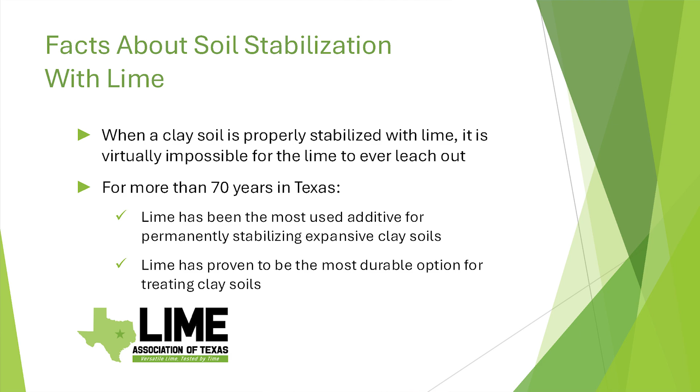So a couple of other facts: for more than 70 years in Texas, lime has been the most used additive, and it's the additive of choice for permanently stabilizing expansive clay soils. In fact, there's really not a good alternative to lime when you're talking about expansive clay soils.

It's proven to be the most durable option for treating clay soils, and if you look at any recommendations really throughout the United States and even in the world, people say that on high PI clay soils, lime is going to be the stabilizer of choice.

A few other facts about soil stabilization with lime: when lime is designed and constructed as specified, there's a couple of things you should know about lime stabilized soils. One, they'll start with a pH value of about 12.4, and that pH will remain at least above roughly 10.5 throughout the life of that subgrade. So 20 years, 50 years, 100 years down the line, you go check the pH of that soil, it's going to still be above 10.5.

It'll also continue to gain strength over time, and that pozzolanic reaction that's happening in the soil will continue to happen as long as there's enough free calcium and moisture in there to keep that pH up and to continue that chemical reaction.

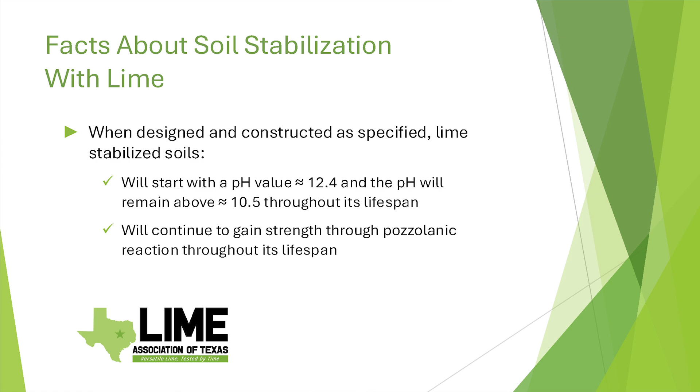This is a little slide I got from Tom Scullion from TTI doing some research on some projects in Texas, and this was just a particular ramp that he was looking at. So you start with an 8 KSI value for the native clay soil that was there. Once that was treated, that was increased up to 140 KSI over time.

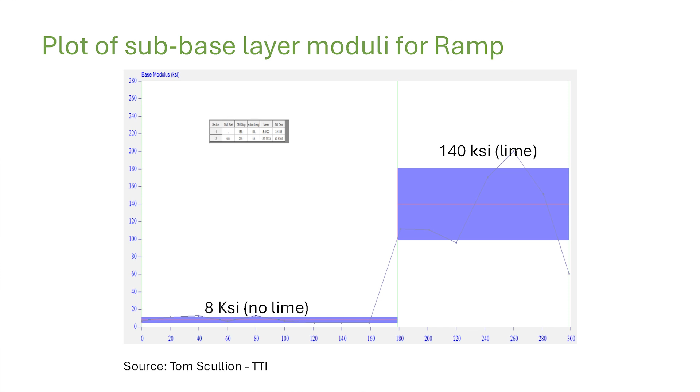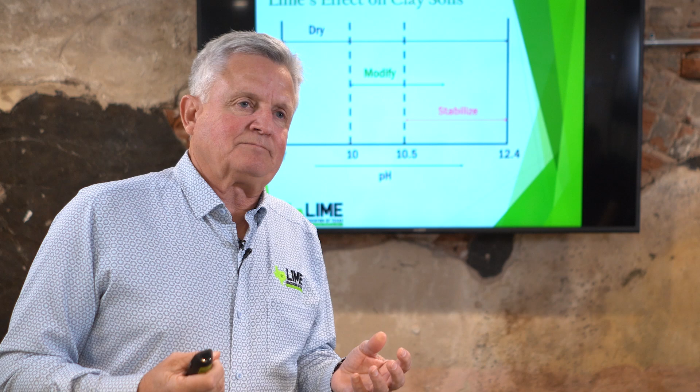So I don't know the exact age of this particular pavement, but you can see here the example of lime doing what it's supposed to do, which is increase that strength significantly over time. We've talked about this slide before. I show it a number of times, but I only want to focus on the red area here right now, when we talk about stabilizing a clay soil.

So if you stabilize a clay soil, first of all, you need to do a lime series test, which we've talked about in previous podcasts, to get that pH up to 12.4 and make sure that you have enough lime in it to properly stabilize it. If you do that, the pH should never go below 10.5, so it will stay up in that range.

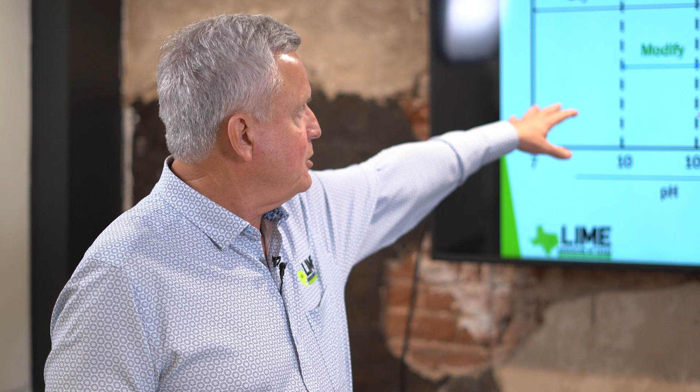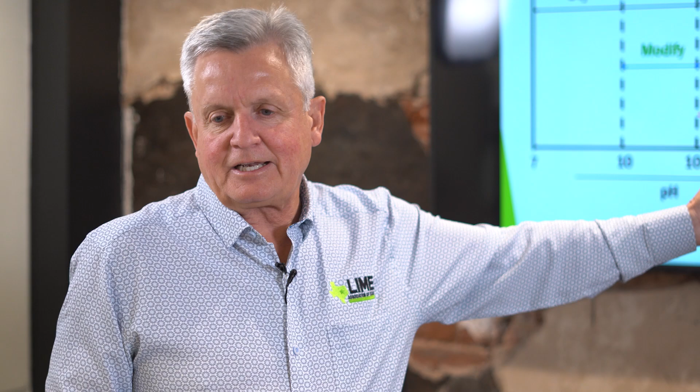Now, if you put a lesser amount of lime in there, you're going to do something what we call modifying that clay soil. Modification starts to happen at about a pH of 10, and it will go up a little bit above 10.5. But over time, and it doesn't really show it on this graphic, that pH can actually go back down to 7. It's not a permanent solution.

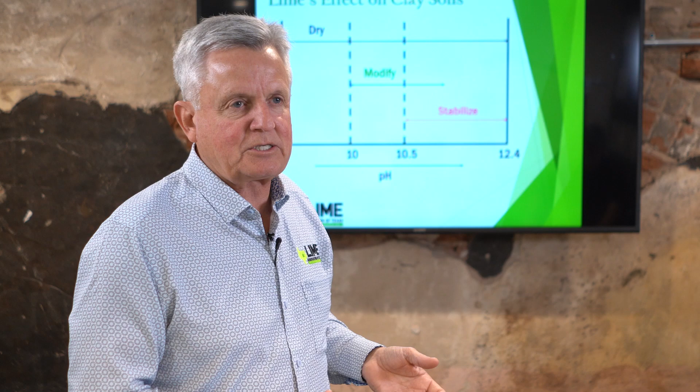So if you put a little bit of lime into a clay soil, it's essentially going to get consumed, but it's not enough lime to keep that chemical reaction going throughout time. So that's kind of the main difference there.

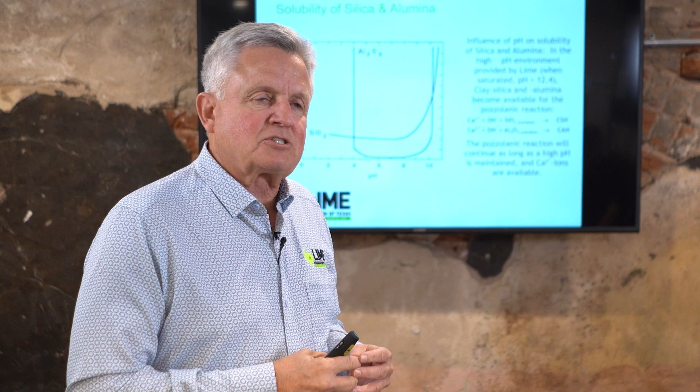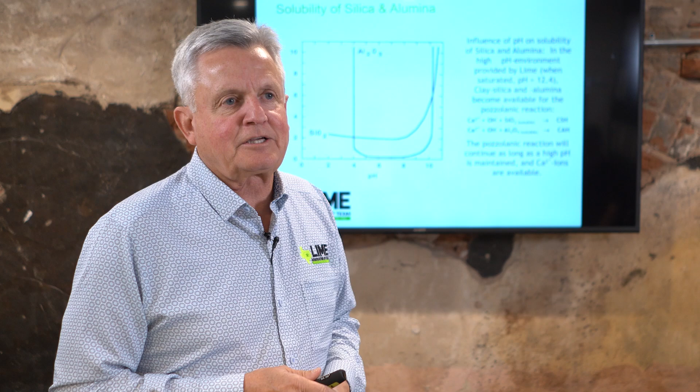This is another slide that I show all the time, just showing that to solubilize the alumina and silica that's in a clay soil, which is really our goal. So to form a pozzolanic cement, you've got to make the silica and alumina soluble. To do that, you've got to get the pH up at least to above 10 there. So again, our design procedure is to go all the way out to 12.4 here.

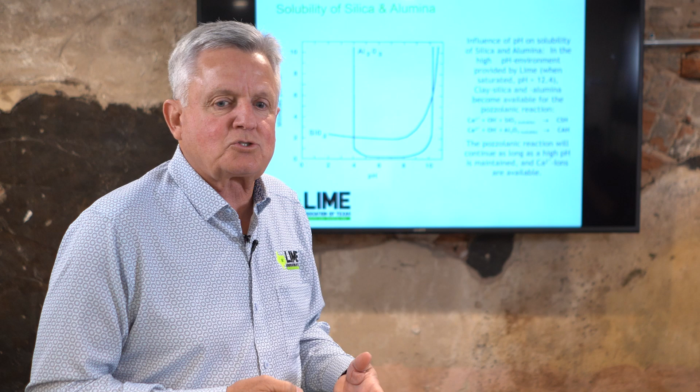But this is the main reason, because you can't otherwise form a pozzolanic cement, which is what causes the permanent reaction and the long-term strength in that soil, by forming the calcium silicate hydrate and the calcium aluminate hydrate. So again, to make that happen, you've got to get that pH up there above 10, 10.5, and maintain that over time.

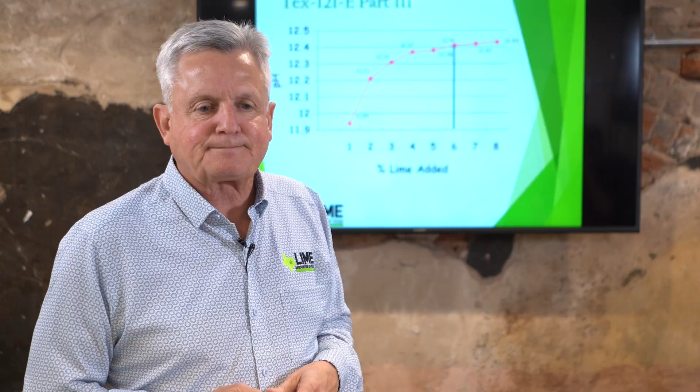This is another slide I've shown many times. Again, this is the design, the Eades-Grim or the lime series test, showing that to get up to 12.4, you have to add enough lime in there. And this also shows what happens when you don't get enough lime in there.

So if you only put 2 or 3% lime in there, you may get the pH up initially. You may get a textural change, a breakdown in the gradation. You may see a PI reduction, but you're never getting to the point of forming long-term pozzolanic cements that are going to continue to gain strength over time.

So really, this is our goal. Just looking at the picture, it's changing a bad soil into a good soil that is a workable construction material after doing lime stabilization.

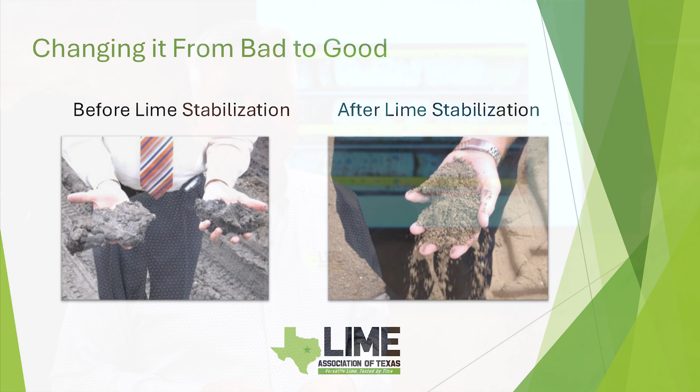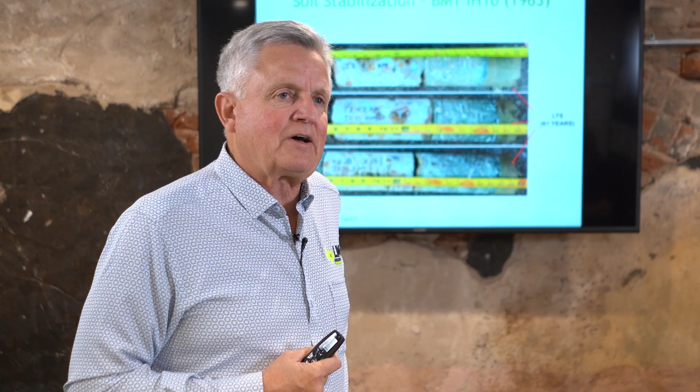I want to show some historical data here. This is some work that's done by Ruben Carrasco at TxDOT. So they've looked at a number of pavements throughout Texas over the years, when they're going in and doing forensic studies and pavement evaluations. And this particular project is in the Beaumont district of TxDOT. This has been down 61 years, so it's almost as old as I am.

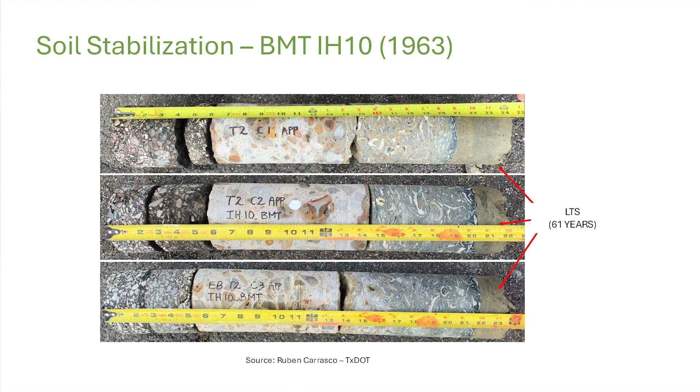And what you see is the lime stabilized layer at the bottom of that. It actually does form and looks like a lean concrete underneath there. So when they take these cores out, many people often mistake this for an old concrete pavement or something underneath it. But that part at the very bottom is just the lime stabilized subgrade that was done 61 years ago. So that one was done in 1963.

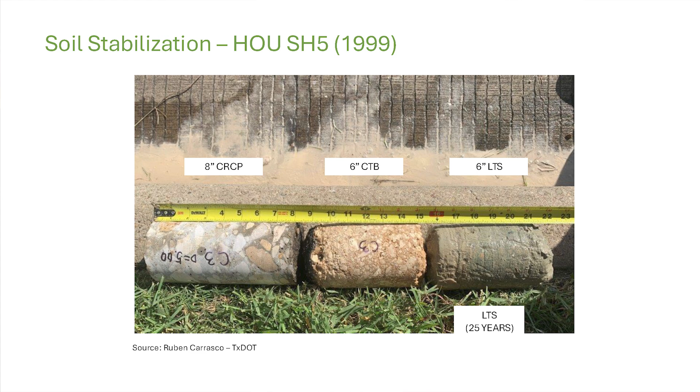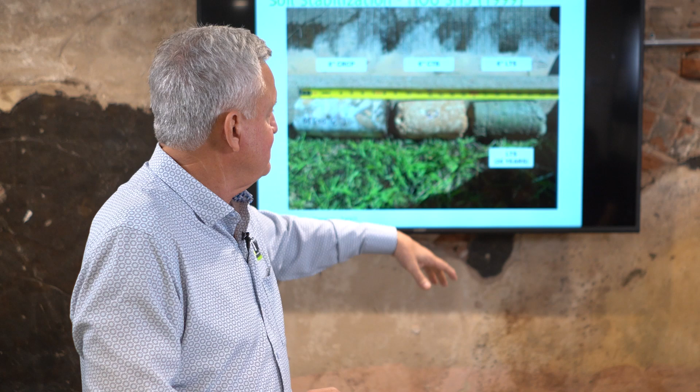Here's just another example of what lime treated subgrade looks like. This one is wet, so it's a little bit deceiving in the picture. But again, it comes out as a solid. It doesn't come out as a fine, friable material. It comes out looking like a solid, almost looks like just wet concrete there. But that one's 25 years old. This was in the Houston district, done in 1999. Again, this was from Ruben Carrasco.

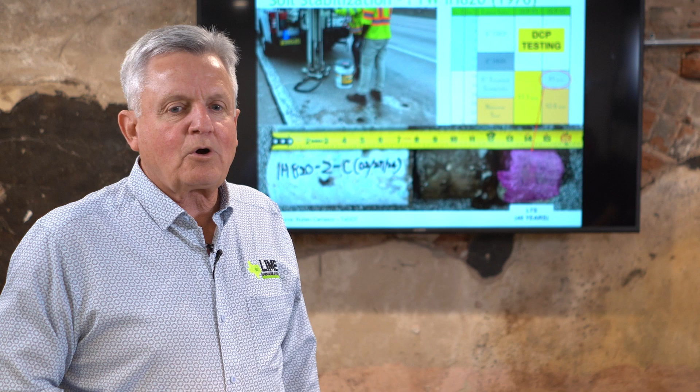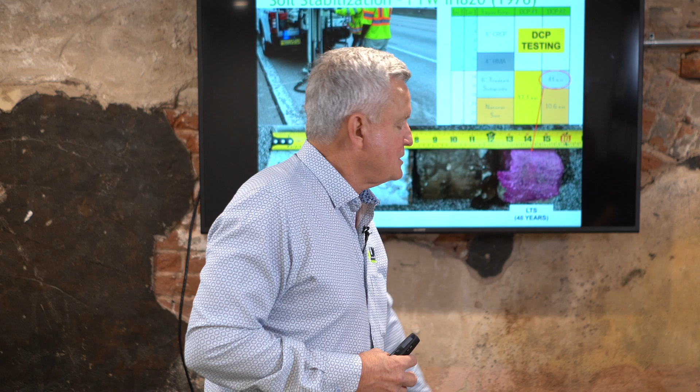And then here's another project that was done in Fort Worth, 1976. This is underneath the concrete pavement. This is, I believe, either the base material or some hot mix asphalt that was underneath there. But this is the lime-treated subgrade that has been down for 48 years. After 48 years, some interesting things happen.

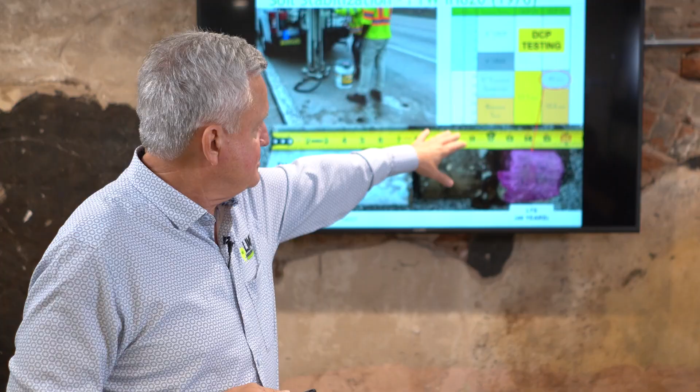So if you look at the strength there, it goes from a 10.6 KSI, which is a relatively weak subgrade when it's untreated, to 41 KSI for the part that's treated with lime. 41 KSI is getting very similar to what the granular base material would be. So it's got about 4 times more strength than the native subgrade. The more interesting part is if you add a liquid called phenolphthalein, which changes colors.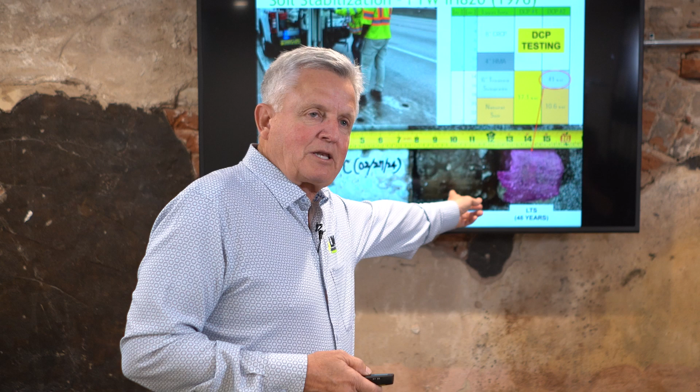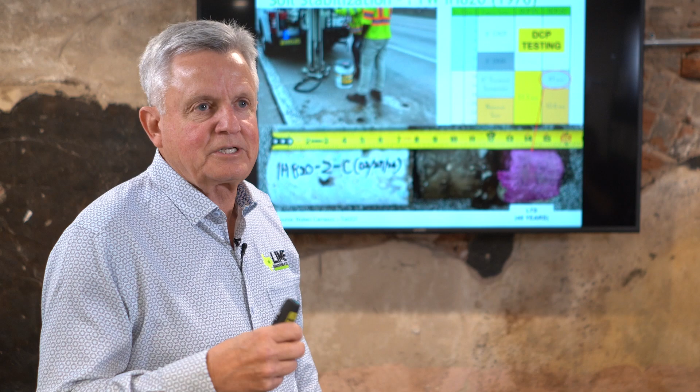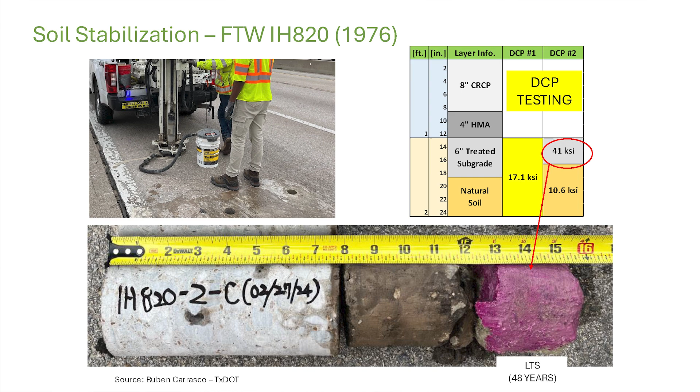It changes from clear to this pinkish color if you have a high pH. So typically, and I've heard different numbers, but a pH of at least 9.3 will usually start to get a color indication. But after this has been down for 48 years, you'll still see the evidence that the lime is still there, still working, and it's still changing colors. And so that's a pretty good indicator that, yeah, we've got lime in here, and this is evidence that it's doing what it's supposed to do.

So one of the things I hear from people that say, well, we think the lime leached out, is because they'll go in with phenolphthalein, and if it doesn't change colors, they say, well, okay, it must have leached out because it's gone. Well, there's a couple of things that can happen there. That lime may have gotten consumed and there wasn't enough lime in there to really fully treat that and keep that chemical reaction going. And in that case, that pH is going to be up temporarily, and then it's going to drop back down.

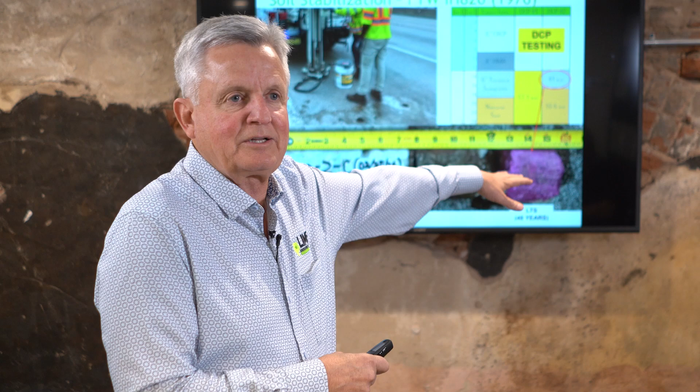So it may be below 9.3. It's not going to be detectable with phenolphthalein. So that's one case that we have. But a lot of times that clay has just consumed that lime, and there just wasn't a high enough concentration in it to maintain the pH above 10.5.

So some common reasons that people say that lime leaches out, and I'll just kind of go through this list here, is that usually the amount of lime that was added was insufficient to reach the pH of 12.4. So that happens a couple of ways. For one, they may not have initially done a design, which is doing the lime series or the Eades-Grim test procedure, and determining that, for example, this may have needed 6% in a given soil, and you see some random guidelines that just say, oh, we're going to use 4% lime.

Well, 4% lime is enough to modify that soil, but it's not enough to permanently stabilize it or get that pH up enough to continue that chemical reaction to form the hydrates, the calcium silicate hydrate, the calcium aluminate hydrate in there to form those pozzolanic cements.

The other thing is maybe you did the design procedure right and said, okay, we need 6% lime in this soil here, but the amount of lime was insufficient to maintain that pH above 12.4 to be detected. And there's a couple of ways that happens. For example, if you're going to mix 6% lime and you're going to go 8 inches deep with it, well, if you go 8 inches deep, it's going to be 6% lime.